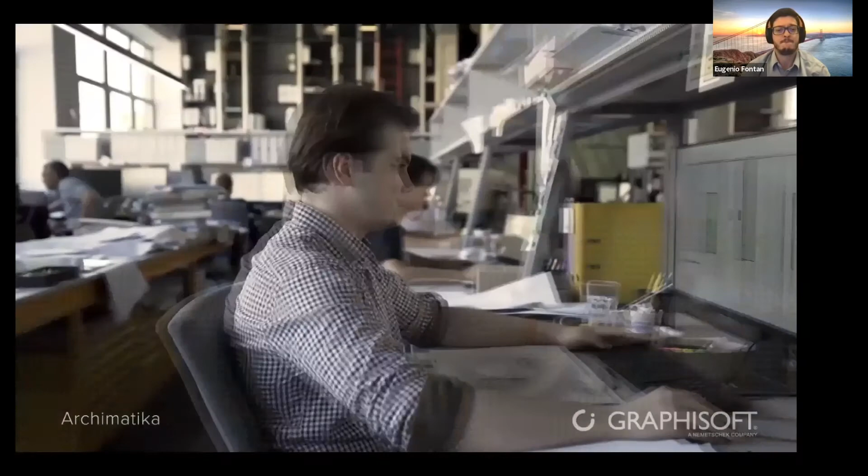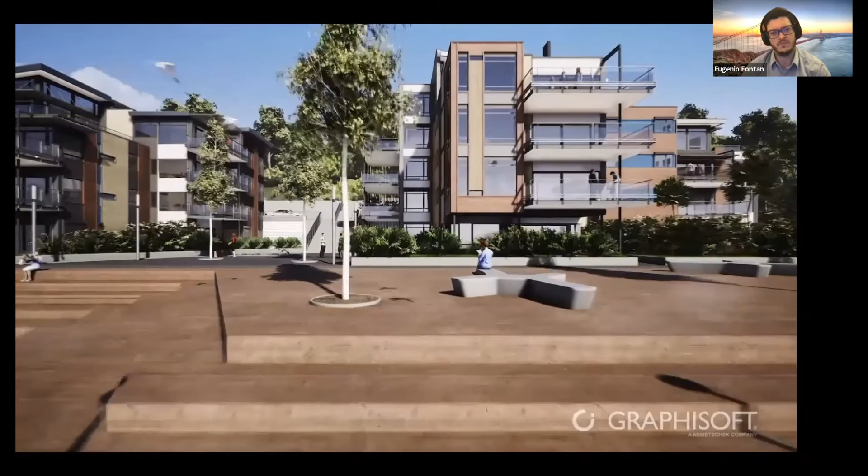First of all, let me introduce briefly my company, Graphisoft. Graphisoft develops three main solutions, which are called Archicad, our collaboration tool which is called BIMcloud, and our application for sharing data, which is called BIMx.

And also working together with the government bodies to try to understand which are the best BIM standards to implement in the region. I think this has shaped the focus of the presentation that I have, which is that there is still a lot of misconceptions, a lot of not best practices in the use of this technology.

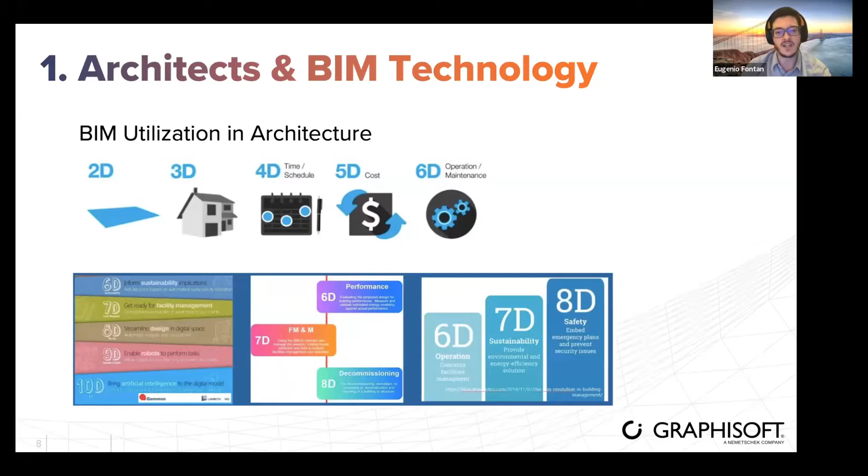I would also like to highlight the BIM benefits, which I think we all have heard of or have used: doing collision detection to understand clashes between disciplines before they happen in construction, extracting accurate quantities for cost estimation, generating accurate documentation, doing energy evaluations, and doing construction performance simulations.

Knowing all these names that we have heard, and in many cases use, the main values would be that BIM is supposed to save errors in the development of our projects, save time, save cost, and help us do a better design and better execution.

And actually, instead of saving time, they are very time consuming. Also the tools themselves, as software, crash or cannot handle large or complex projects as we wish, because they should align with our design intention.

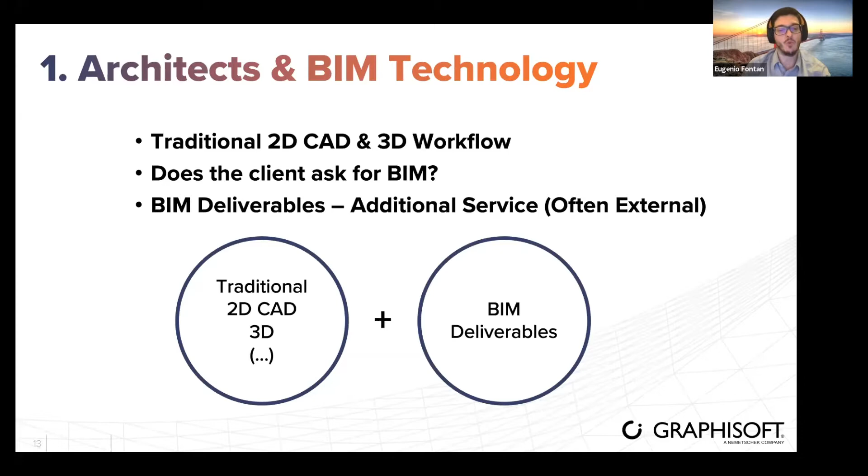And then it often happens that we end up producing double work. We first produce everything as we used to do, and then we produce the BIM deliverables.

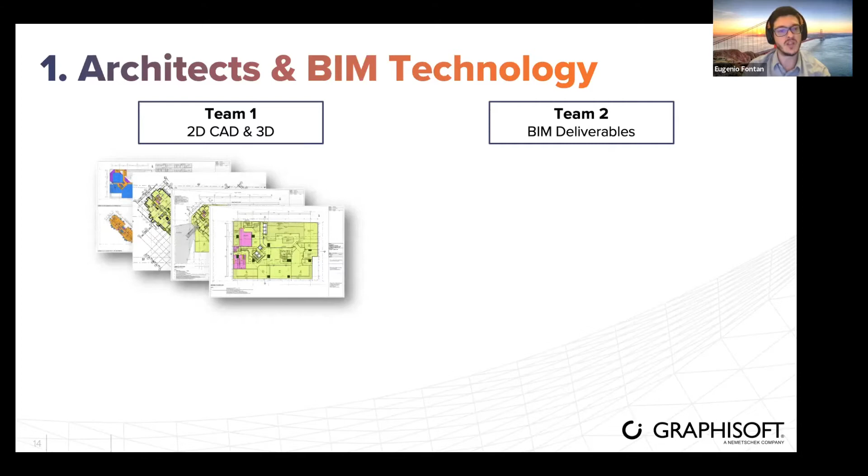So we end up having in companies - and I've seen this also in large organizations - two teams, like two families existing in the same company. One team produces documentation, whether for design or statutory submission, and also 3D models for different studies, renderings, animations. The second team, internal or external, tries to do this BIM workflow in parallel, these BIM models that can produce all the possibilities we were discussing.

So what it means is that we use BIM only when it's required, and the rest of the time we work the way we used to work for the past 30 years. This means we end up having duplicate teams, resources, and coordination, and we duplicate efforts, which means we don't work in an efficient way. For me, it means we're not able to take advantage of technology. We don't leverage BIM to make our life easier, and it ends up being the opposite, right?

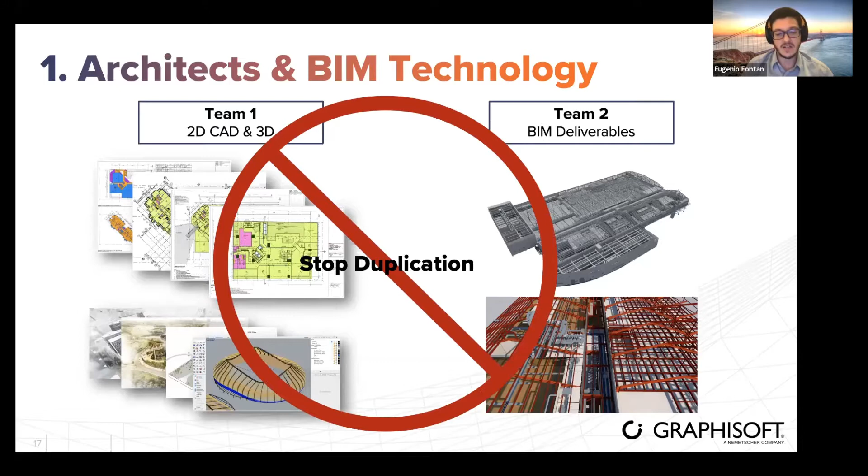So when I see this across different organizations, audiences, or teams we get in touch with, I believe the first thing we discuss is how can we stop this duplication, right? So it's important to understand.

Sometimes I talk about these topics and people say, okay, but what's the point, right? Why don't we work the way we always did? It's fine, we are successful, we have projects. Well, I believe we all have a responsibility to improve.

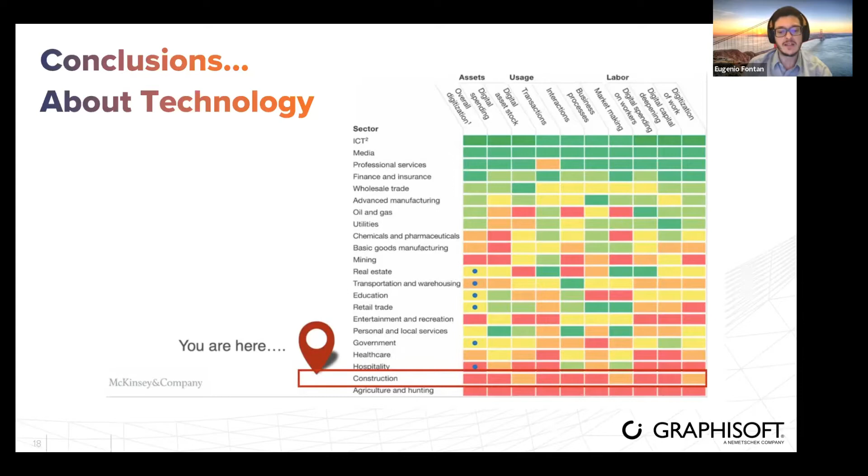We haven't become more efficient in any way, and of course, not more sustainable. I believe that this is something that as architects we have a great responsibility for. So that was the point about what I have observed in different markets about the relationship between architects and BIM technology.

Very often it's not always like that, but it's very common.

What I would like to go to now is the second idea, which is the idea of the intuitive and smart workflow. From my perspective, and I believe also from a lot of the audience's perspective, we should be using an intuitive workflow that automates documentation and data, so we can avoid duplication and truly save time and errors.

We can focus on doing better architecture. We focus on spending our time adding value, and try to automate and use technology to save time on manual labor, so we can do better and more sustainable design and better execution.

So for me, this is the message that I think we need to incorporate and communicate, and we need to try to improve following this idea.

So the idea we propose is that instead of having two workflows, we don't have this idea of working in 2D and 3D separately. We just have BIM as the only workflow in which we automate everything we need to develop our projects.

I know that for some people it sounds like, okay, we already use this, but a lot of peers, a lot of colleagues, they hear this and say, look, how can we do this? How can we really just work in BIM from the beginning?

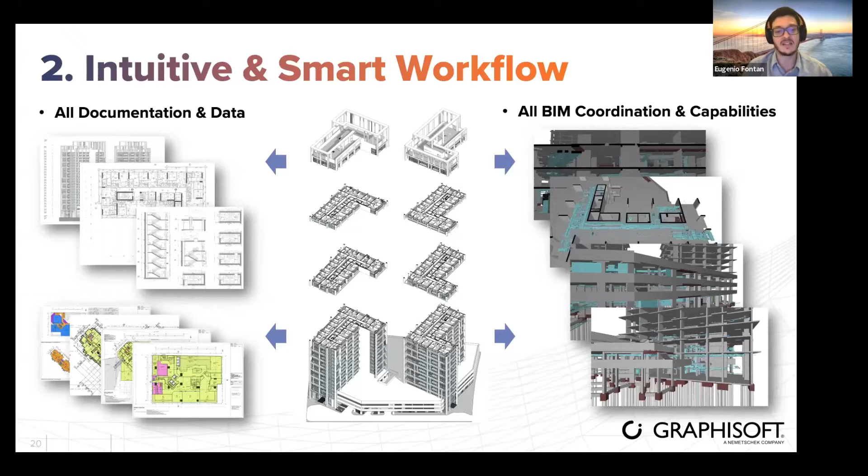Well, I believe that this is the objective, this is the idea I truly believe in. So I'm going to present a few short videos about some topics that I believe can create an intuitive and smart workflow, and how BIM can help us achieve it.

Some of these topics we will discuss later, as Winston was saying. We will develop some hands-on workshops later on throughout the year that will have to do with these topics.

First of all, I believe the smart workflow we propose comes by the hand of Archicad, which is the BIM authoring tool that we develop. The first step, starting from zero, is that if we want a smart workflow, we should start with intuitive design and modeling at the concept stage.

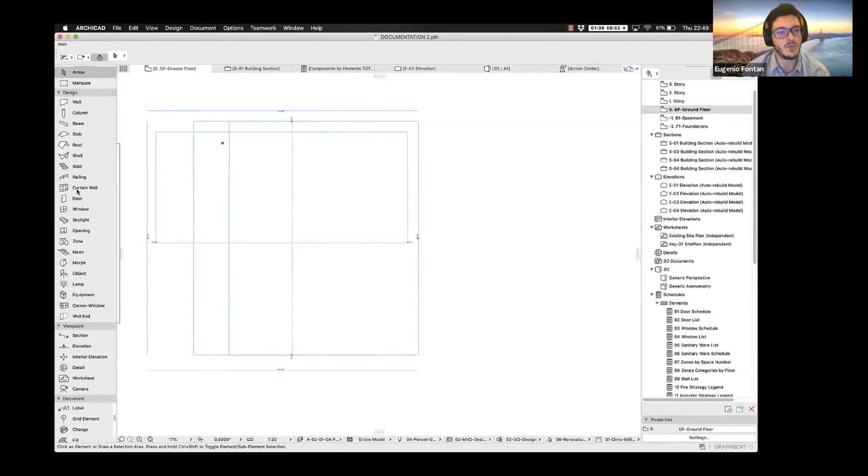In this video, what I'm showing is a very, very tiny, simple model from which we can start from zero. The reason I show this exercise is because, again, most of my colleagues and even friends say, look, there's no such thing as starting from zero working in BIM -- we cannot do that because it's not intuitive and it's not easy.

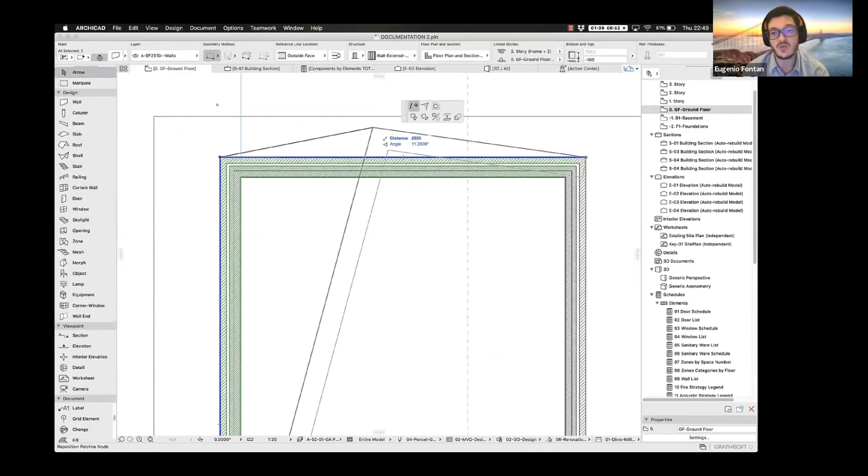Well, I believe that at least the solutions we promote, with a few clicks, let us create a few elements. So we can model as easily and as comfortably as in other 3D tools, with the main advantage that as we model, we also have information, as you can see, as if we're drawing in floor plan. What we start to have is a model that has a lot of information that is going to help us later on develop our project.

So in this case, we're doing some walls. Now we're doing a curtain wall. Instead of having to model all the different parts and pieces, with a few clicks we already have a system in place. And the parts we are modeling already show some of the 2D information that will become the documentation we export later on.

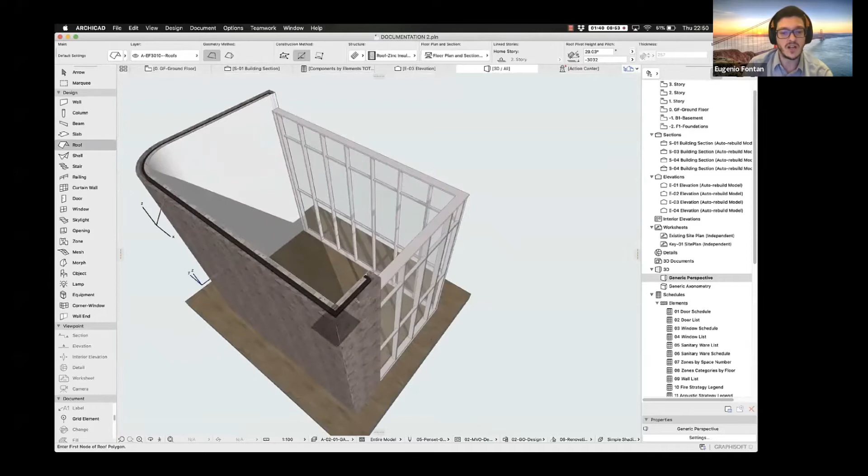So now we go into the 3D window. We can model both in 2D or in 3D when we use Archicad. And we are going to do a couple of operations that will get us the design we desire.

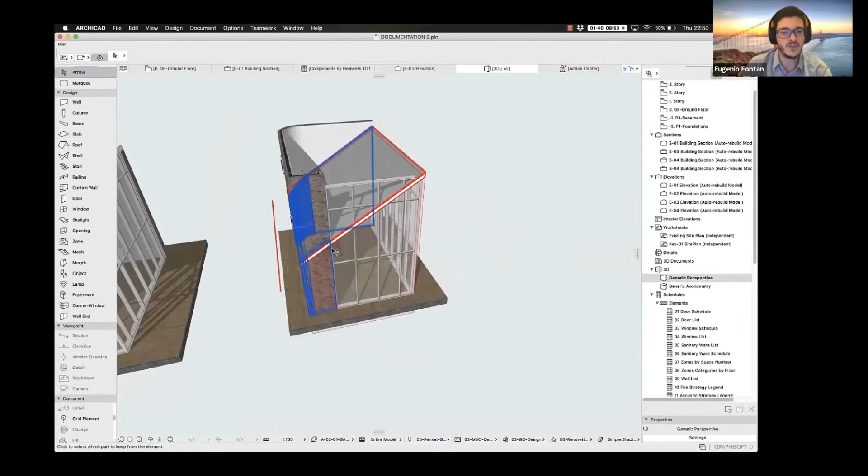Another thing I wanted to highlight is that some of these BIM complaints or BIM problems we were showing at the beginning have to do with how easy this workflow is, but also we've seen how easy it is to create curved geometry, both in walls or in the roof. I believe our BIM solution doesn't have the limitation of geometry.

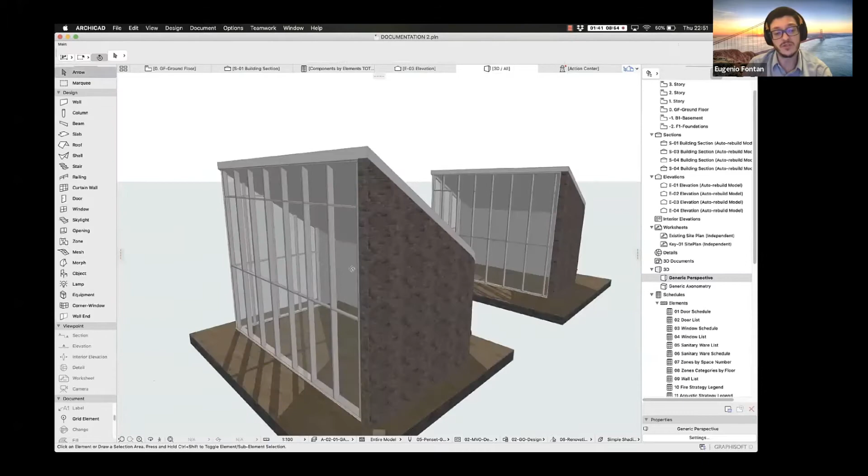We want to provide a robust solution that can very easily create curved windows or curved walls, without the machine we're working on having to suffer or use too many resources. So we can easily adapt the curtain wall scheme to the geometry of the project, and as you can see, in three minutes we already have a small model, and we already have a few documents -- the floor plan, which could even automate the generation of a drawing at 1:50 scale if we want, and we have some sections and elevations.

As you can see, the elements of the model we use already have some intelligent building materials that interact with each other, so they start to automatically create the connections between them.

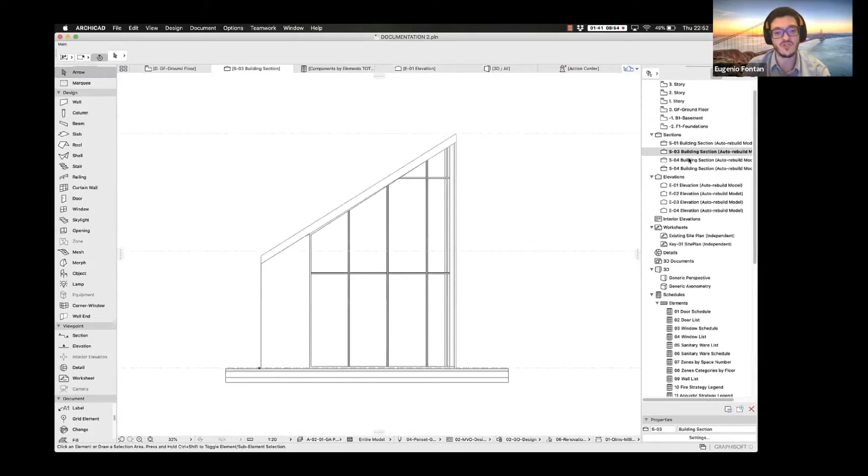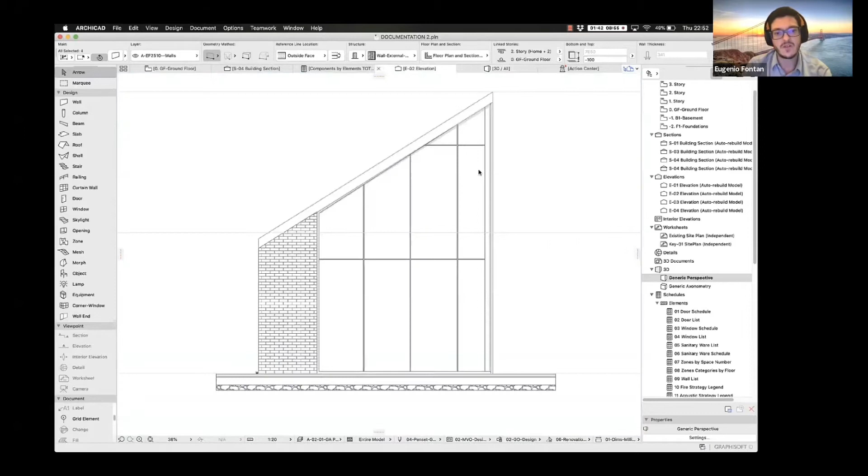Just think about trying to generate an elevation of a brick wall. We could try to do that with 2D tools, but when it comes to the curvature, if we want to do it right, we'd have to work it out manually and it wouldn't be easy or immediate. In this case, we can represent exactly what we have, export this documentation, and we don't have to spend time redrawing.

That would be starting from zero. Now I want to show a video of the combination of Archicad and the possibilities of computational design.

I'm sure most of you are already acquainted with this technology, I mean this tool called Rhinoceros 3D. I believe it's one of the most powerful 3D modeling tools. As you can see, with Grasshopper and visual programming, we can automate a lot of complex geometry.

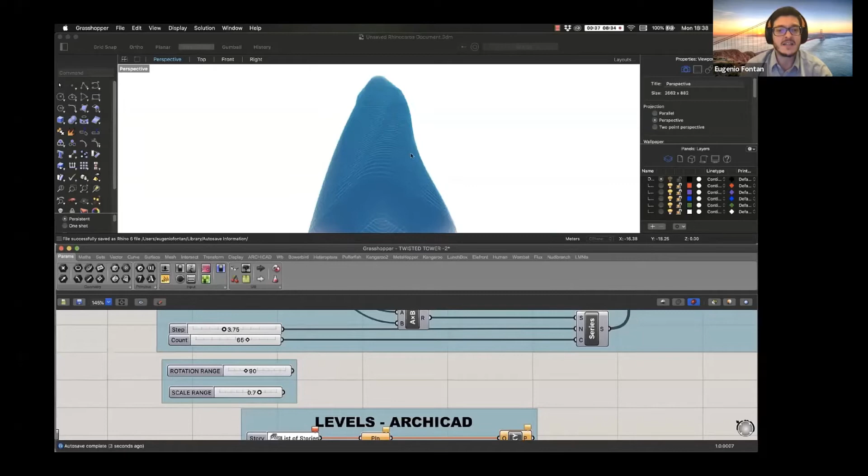We change some sliders and we completely change the geometry of our design. I think this is really where I'd consider automation. And how do we link this with our BIM platform? Well, in the case of Archicad, we have a connection.

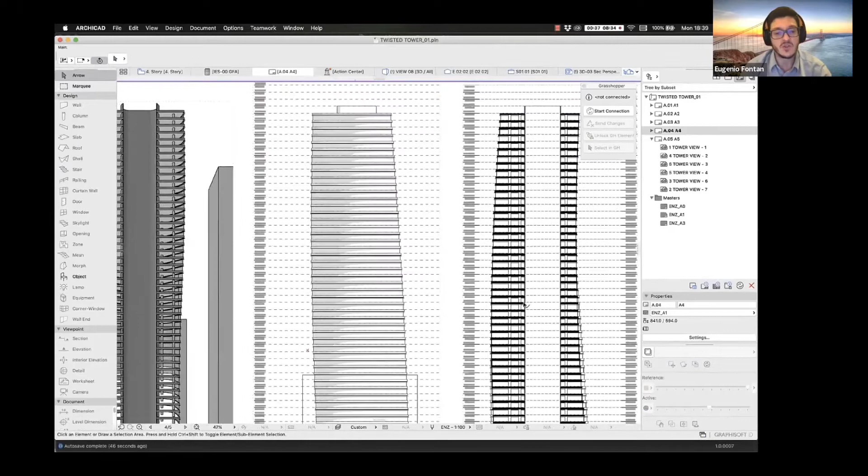What we're seeing here is a first option of a design of a tower that is twisted, very curvy, with some kind of challenging geometry. As you can see, we have the documentation of that tower that usually, if we're not working with BIM, we'd have to export as DWGs and 2D lines, then rework it manually and spend hours producing it. So what we do is delete the first option we have and click on the connection button.

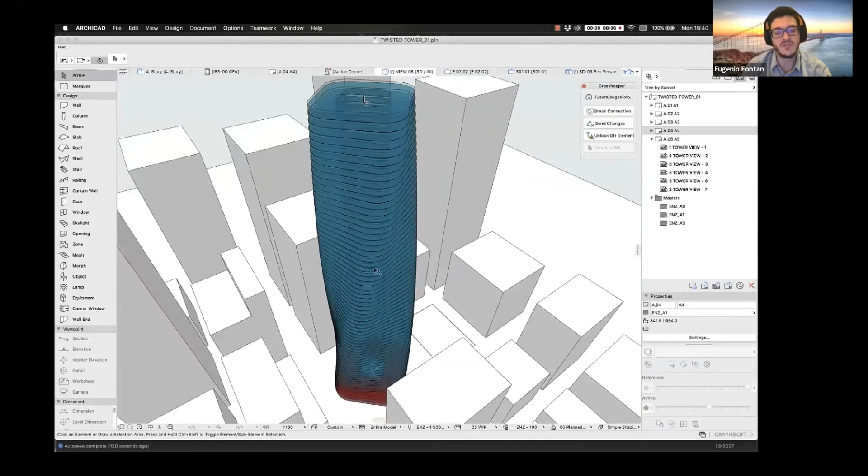In Archicad, now there is established what is called the connection. All these nodes we can see have a little toggle that says true or false. When we turn them true, they start sending elements to Archicad. So the curves and polylines we have in Rhino, as you can see, become part of our model. In this case, we have the walls of the facade and the spaces.

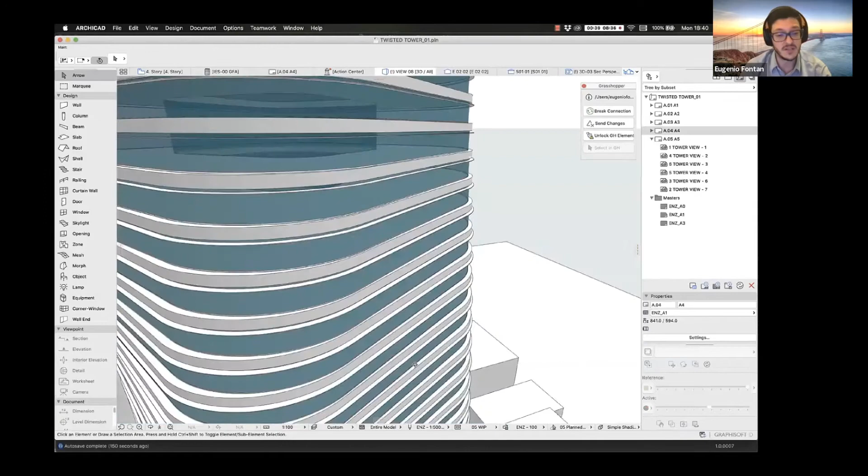These elements are called zones, the spaces of the project. Now we're going to pass from Rhino to Archicad the slabs and the shading. So anything we have in the model in Rhino becomes part of the model in Archicad. And this means this model is the one that's going to generate the documentation and information for ourselves.

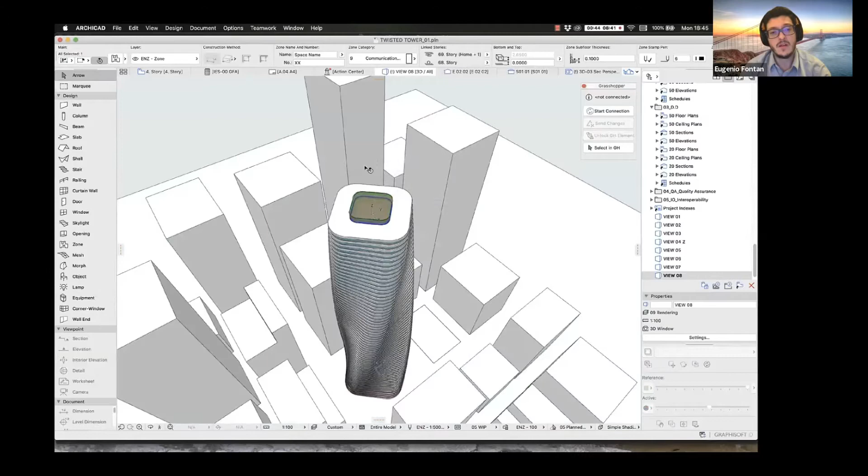Now we're going to pass, for example, the parts, the core walls of the core structure of the project, also the spaces, the zones. And now in the last step, we're going to pass the structure, the columns.

Those turn red when the connection is not running. When it's running, it turns gray. We can click true to synchronize, and in a few seconds the column will arrive. Of course, if the geometry is very challenging, this connection can take a bit more time.

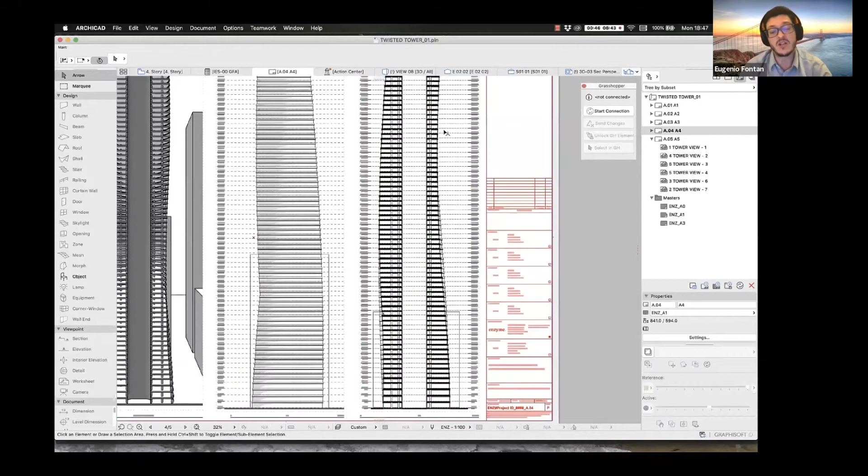This video is, I think, less than 4 minutes, and I just accelerated it, so it goes twice as fast as real speed. The funny thing is that means in 8 minutes we have someone who has done a project in Rhino and Grasshopper—and we probably all have friends or colleagues who are very good at it, because I think it's really a great tool—in a matter of minutes, we can have that model in Archicad, and we can have this documentation automated.

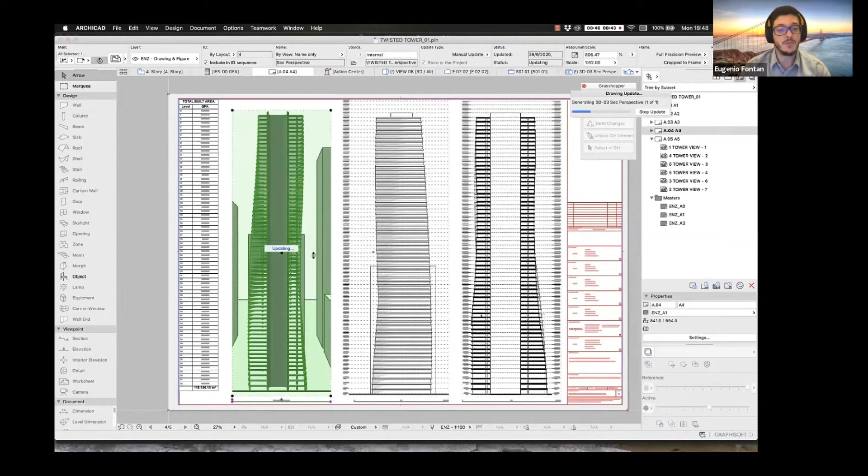Also, something I want to highlight is that we've all heard that some BIM platforms and tools are not robust enough to store large or complex models. So what we want to promote among architects is that our solutions are robust enough to hold these large models. That's where we think this makes the life of an architect easier—we don't need to split the model into many pieces, and we don't need to wait long hours for the geometry to display.

We can really store large models, and we don't have to deal with the heavy limitation of needing to buy a new machine every time.

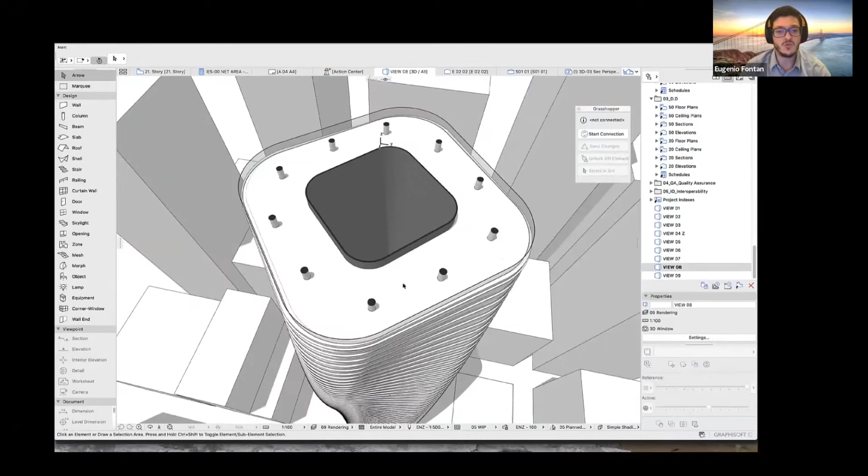We keep automating the drawings from the models. You can see that the plan has changed following the new design, and of course we can take views and explore the 3D without having problems.

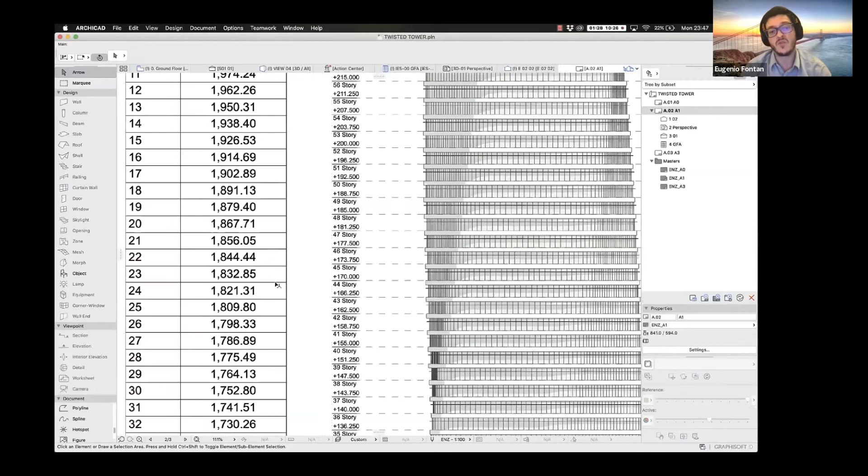When we develop our design a bit further, we can have the curtain wall and more detailed documentation that, once it's in Archicad, we can keep developing using the Archicad tools. Once we have this, it's enough to have one click, and we export all these PDFs in DWG format or whatever is needed for the development of the project.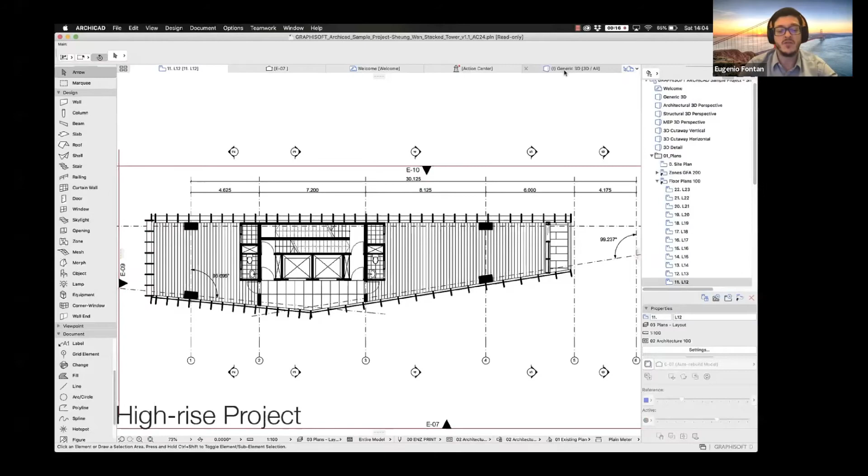Once we start the design, we continue with the documentation. In a more advanced stage of the project, we want to extract this documentation saving as much time as possible. In this example, we're showing a tower with curtain walls and a lot of geometry, and we still can move around without any problem.

We can also work in perspective, which I believe is quite important, because I really like to export axonometric documents, but I need to design in perspective. For me it's quite important. In this case, we're going to use one tool called trace and reference.

This means that whatever view we have in 2D, we can overlay another view in 2D - in this case, for example, the elevation. With this menu of trace and reference, we can see more or less the trace.

We can even hide the active view, which is the floor plan. This allows us, as we work in the floor plan, to see what happens in the elevation, in the section, or another floor plan at the same time.

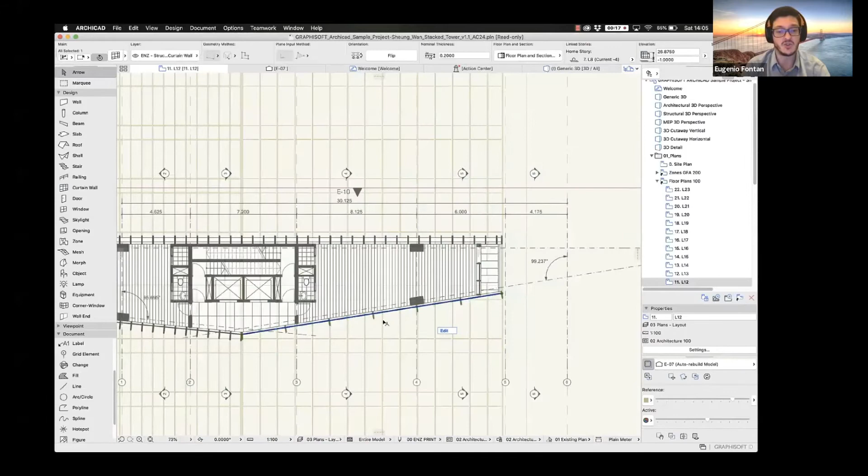In this case, we're changing the dimensions of the curtain wall. You can see how it changes in plan, and now, in a few seconds, it updates the elevation, and we can see how the elevation has changed as well. We can switch between views.

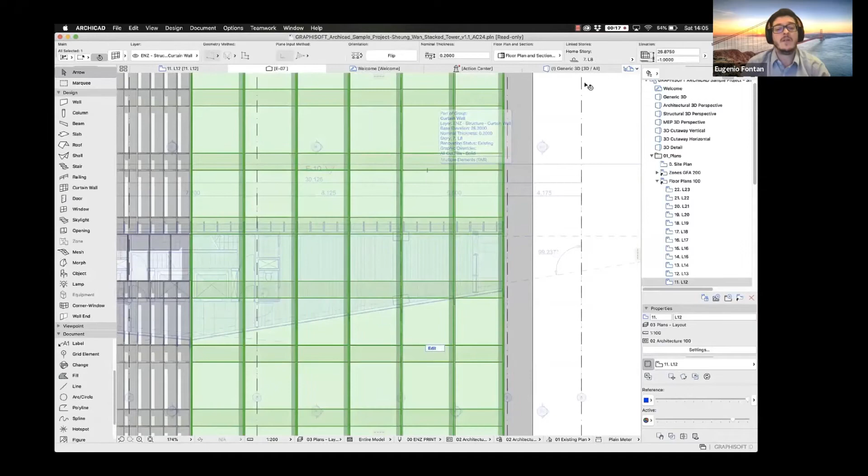We can now go into the elevation and have the floor plan as a trace reference, so we can constantly have feedback of how our design changed when we change different parts of it. I think this helps a lot in the design process and saves time in documentation production. And in the 3D, we can have a look.

If we're not convinced, we just go back and put the same dimensions we had before, or we can keep modifying further, and of course floor plan and elevation will update.

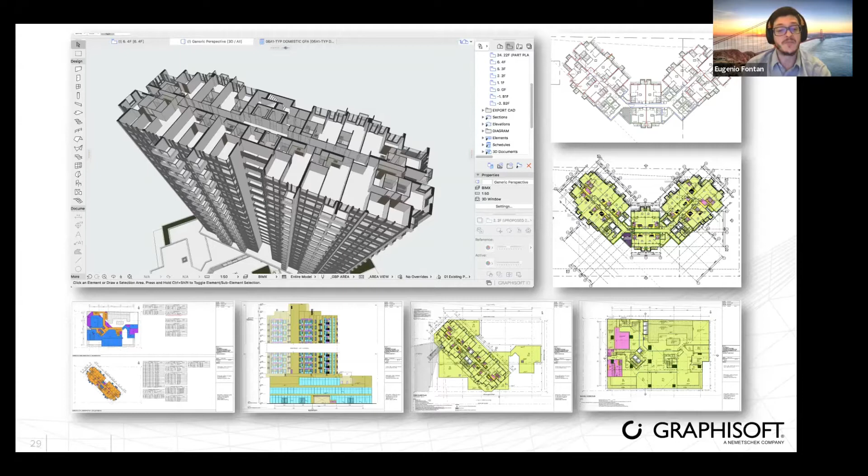In another further workshop, there is also this template that we developed together with some of our customers for the Hong Kong market, which is to automate the submission of the GBP for the buildings department. I think this is also an advantage to be able to save time at this stage.

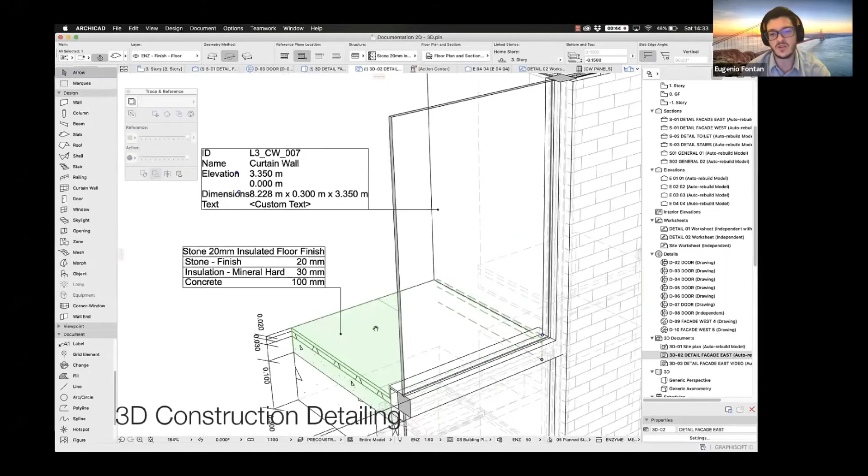In this short video, I'm going to show how we go deeper onto the scale of construction documentation. Doing construction details in 2D is something that is necessary, but sometimes we want to explain things with axonometric or 3D views because it also explains very well.

As you can see here, we have the different parts of our model that we are selecting that are producing the documentation. If I change the type of wall, you can see that the labels are smart - if I change one part of the model, all the labels in all documents will be updated. In this case, I change the material of the slab, of the finished floor, and the description will be updated as well.

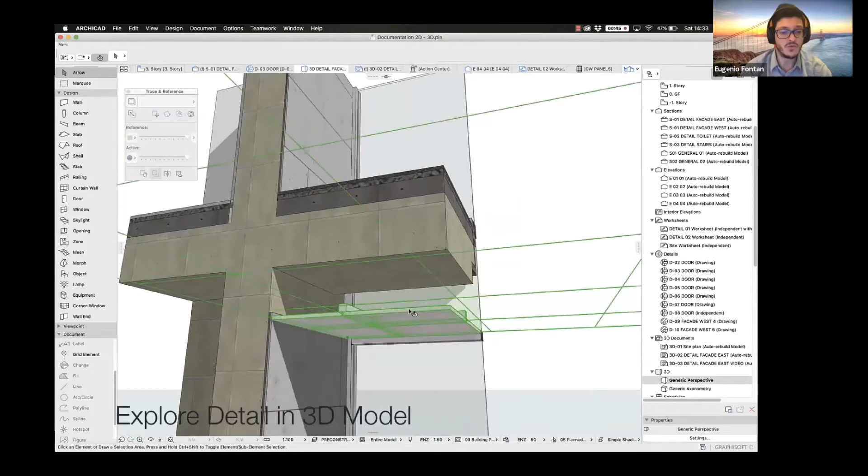Another interesting thing is to be able to go back to the 3D view that generated this 3D document, so we can move around and study the detail more closely without having to create additional cameras or views. We can re-navigate in a natural, easy way, so we can make sure the design keeps looking as we want it.

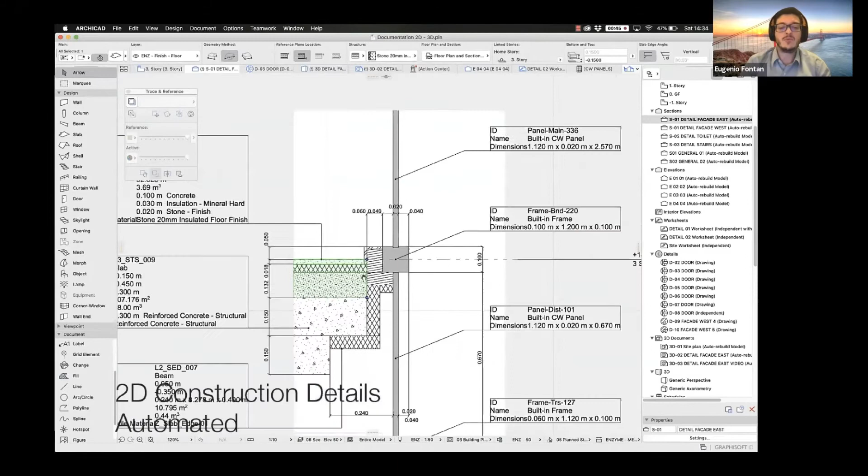From that same model, those elements generate the details. I believe that up to scale 1 to 50 or 1 to 20, it's easy to have all the documentation automated from the model.

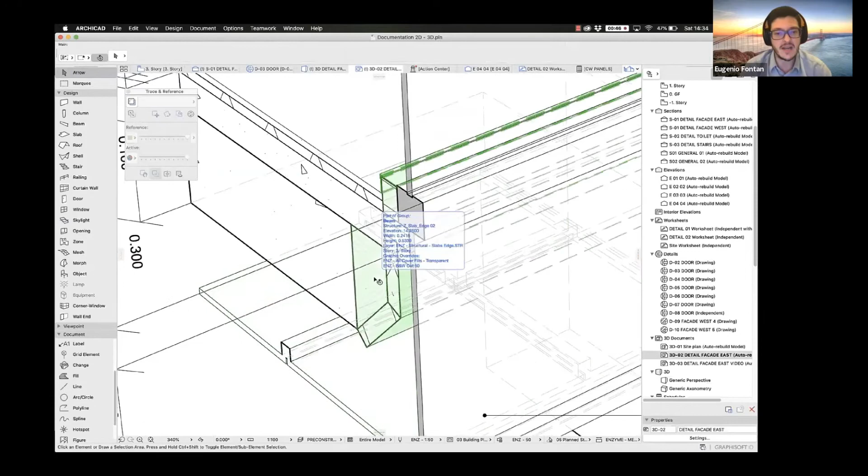When we want to add more detail, to get to details at 1 to 10 or 1 to 5, we can draft on top of the details, but we always do it on top of a detail that comes from the 3D model and is coordinated. As you can see, we change one type of profile and it updates in all the different parts of the document.

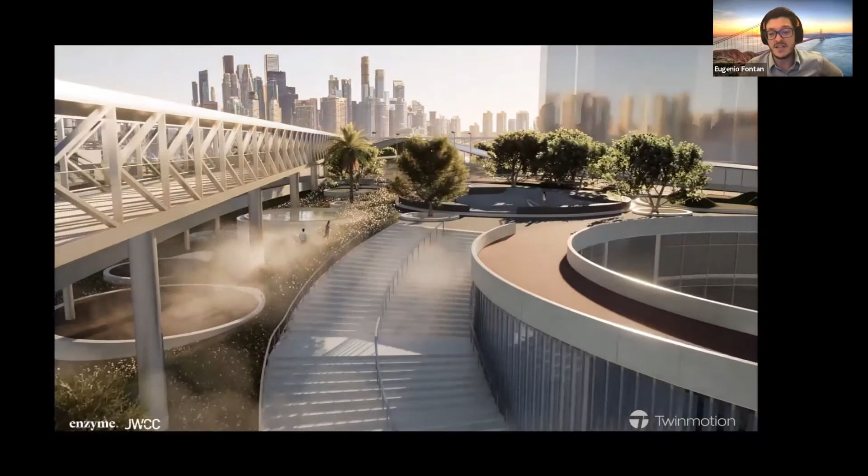Another aspect that an intuitive workflow should allow us is related to visualization possibilities. Sometimes to explain and communicate our projects, it's quite important to have really impressive animations. It's very common that we need to pay expensive teams to do this animation outsourced, but this platform, called Twinmotion, is really easy to use, and we can create these animations in-house.

I have a brief example that I opened in YouTube because I wanted to show one of my projects, but for some reason the link is not working. I'll have to show you this next time. I wanted to show that this animation is not something we need to outsource. It's very easy to navigate, very easy to create ourselves, and it gives us the chance to produce this type of material without having to go after additional external consultants.

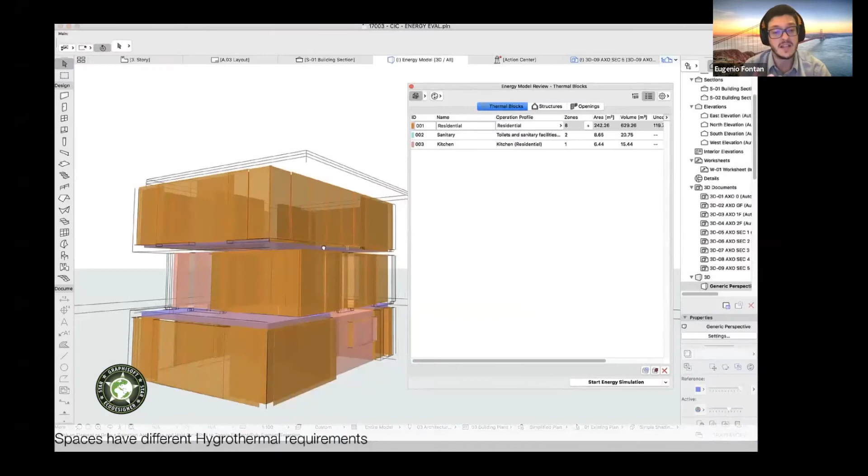Another aspect of the workflow we promote is about energy evaluation for sustainable design. In Archicad, the spaces, called zones, have information about the temperature and the different comfort requirements they have. These spaces also understand the different construction around them to get that hygrothermal comfort. So if we change the construction of the project, these spaces will understand that change, and the energy requirements needed to reach that comfort zone will change.

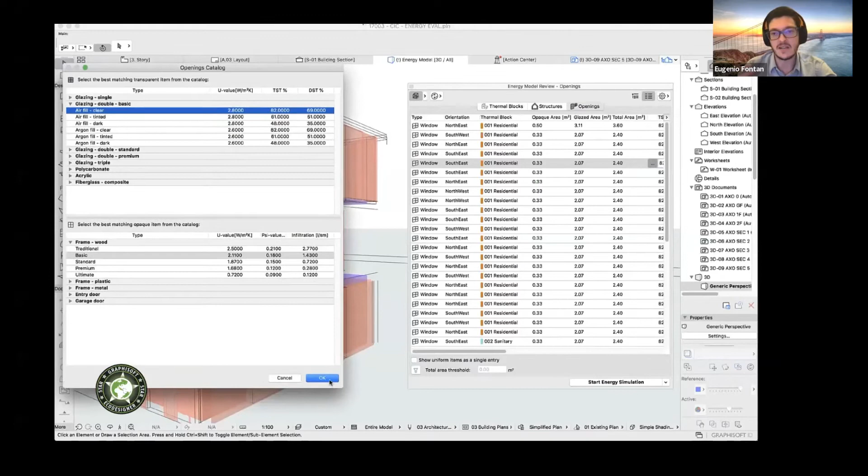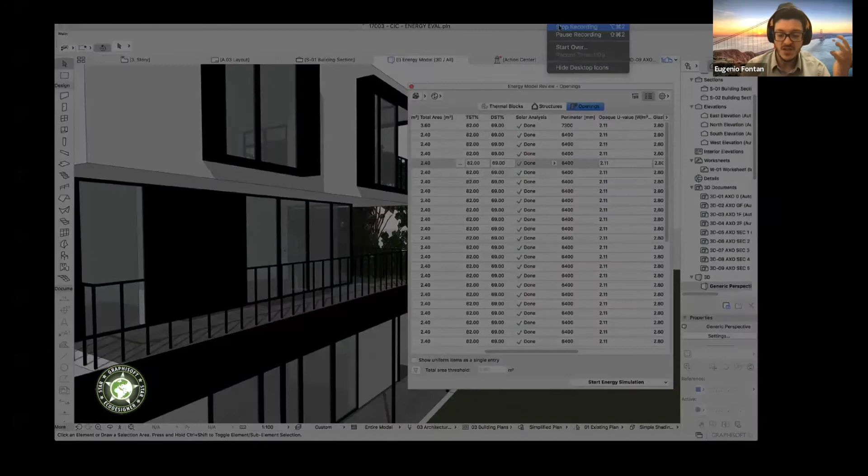We can evaluate, depending on our design decisions, the energy requirements of our project. We can even select, as you can see on screen, the different glazing systems, windows or doors, and analyze all the physical characteristics, even seeing how the sun impacts that glazing surface. This is important because it generates the greenhouse effect. If we change the location, orientation, or shading of that element, this data will be updated. We can use the model again to do this analysis, because it already has all the physical characteristics of the real construction.

Regarding compatibility, Archicad is quite compatible with many different platforms. I tried to put here all the options I know are available. Archicad can very easily exchange data with this group of tools, exporting and importing CAD files, Rhino files, SketchUp, connecting with Twinmotion, Enscape, Cinema 4D, and of course all sorts of PDF documentation and DWG. We can extract hundreds of packages of drawings with one click in these formats.

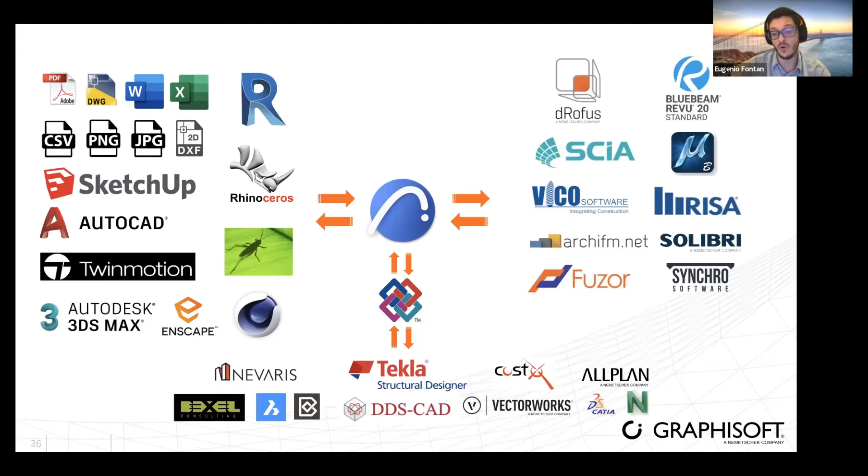We also have direct connection with many BIM solutions, shown on the right side, like dRofus, SCIA, and others. Using the Open BIM approach with IFC, we can collaborate with all the other BIM solutions in the market. This means Archicad allows great compatibility with other tools and other teams. This is a diagram from one of our clients in Japan, Nikken Sekkei, who have been using it for many years - you can see the logos are totally outdated. They've been using Archicad as the backbone combining the different operations of the project and the different performance of the various tools.

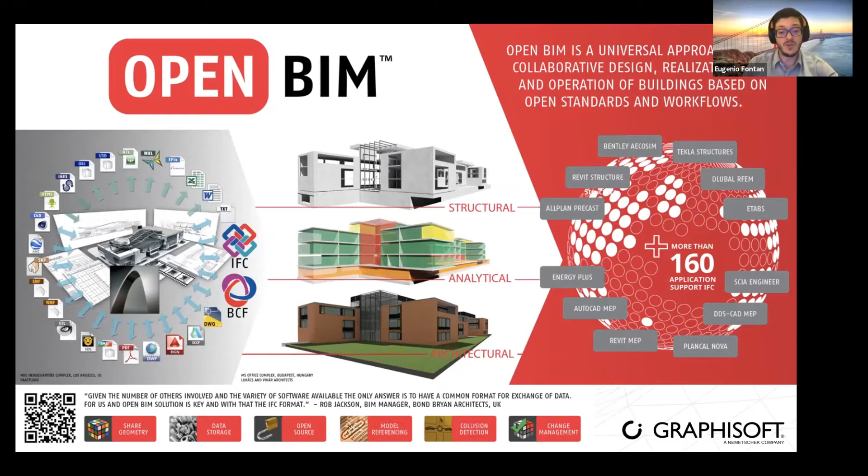Some of you will be familiar with the concept of Open BIM, which means exporting BIM in open format. Our solution is really compatible with all the Open BIM standards. Working with the construction industry and Hong Kong BIM, I've personally conducted workshops explaining best practices to avoid data loss between platforms, in this case Archicad and Revit. These workflows can be learned, they're easy to implement, and we really enjoy working with our customers to make this easier for them.

So in this short video, I'm going to show some of the easy compatibilities, or interoperability, that Archicad has with other platforms. On a website like BIM Object, we can download objects in different formats. In this case, we're using SketchUp, IFC, and Revit.

This means we have access to hundreds or thousands of online libraries we can use. Again, it depends on how the object has been done, we have more or less level of detail. Of course, later we can add as much data as we need.

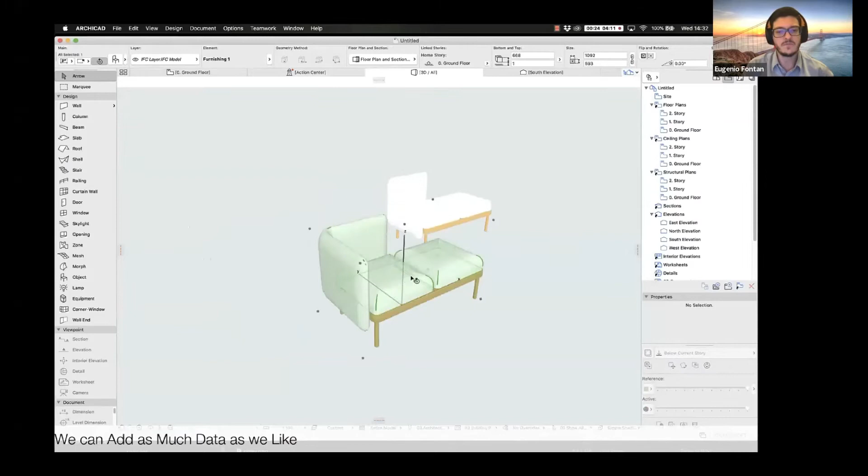Now we're going to add the Revit family. There's this menu, Import Revit Families, and it will be translated as a native library of Archicad. We can choose the different level of polygons, and once it's in, we can go to the object tool and place the new Revit family.

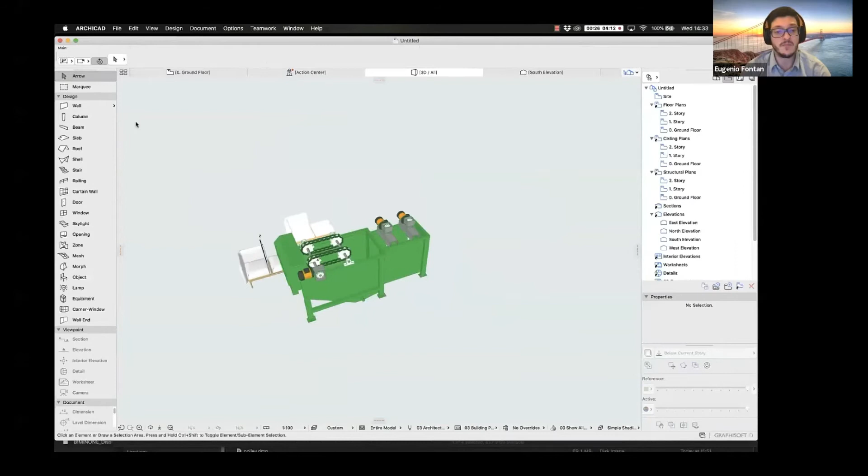These elements can be edited further later on to be smarter or have more possibilities. When we just drag and drop, maybe some of the native possibilities of the object aren't there, but very often there are a lot of them. For me, I think the relevant point at this step of the process is that we can change the data inside the object.

Here you see, when we do Save As from the 3D window, you can see all the different format files: Collada, Rhino, Google Earth, SketchUp, and the same from the program. We can just directly save as in almost any format needed for our architectural work.

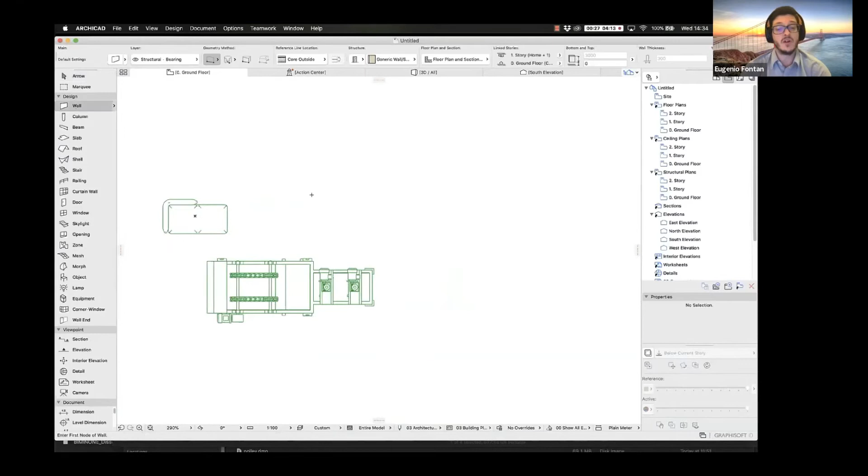Apart from this, Archicad comes with thousands of predefined smart objects that are highly customizable. In this case, you can see the possibilities of having different types of doors, and all these objects are here out of the box already when you use Archicad.

Apart from the possibilities of doing our work, I think that even nowadays, more than any time, we need to be able to work from anywhere, work from home or remotely. That's why we have this BIMcloud solution, which allows a team to work within the same local environment, different people in the same project, but we can also connect remote offices very easily, collaborating from different countries in the same models.

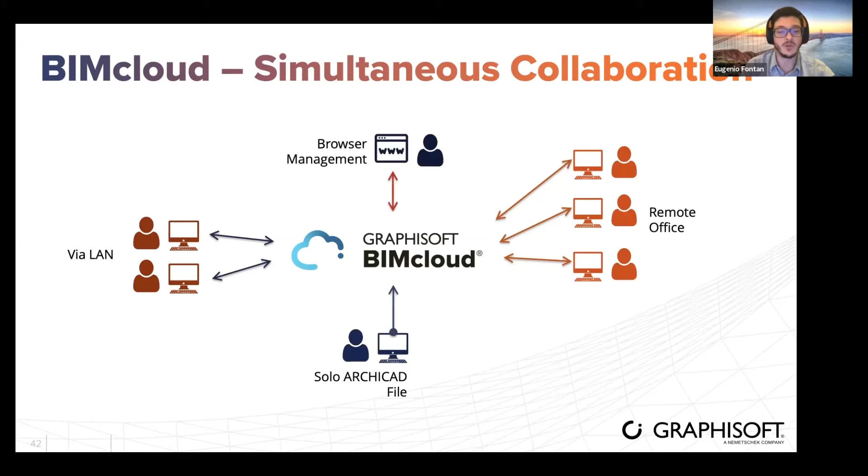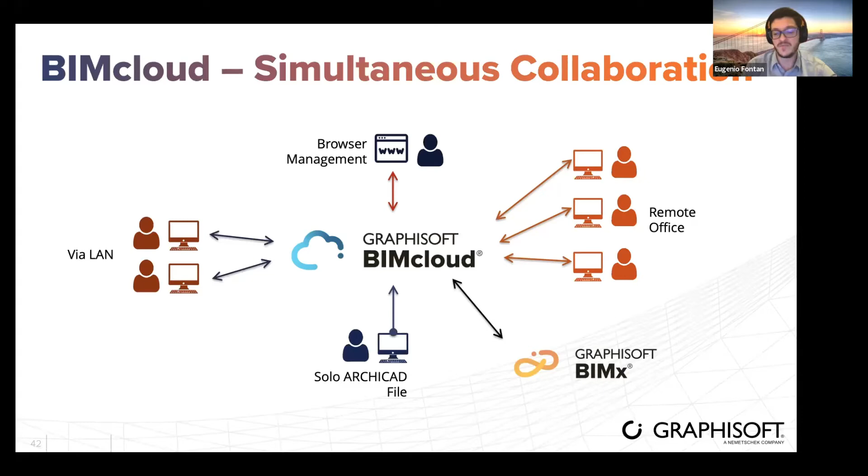We can also access this data and these projects through a web browser. And then the connection with our other solution, BIMx, will let us see the project at any time during its development.

In this video, I want to show briefly this collaboration workflow. You can see here on this palette, the one that says Teamwork, it says Andrew. So this person, Andrew, is working here, and there are two people connected to the project: Andrew and Marty.

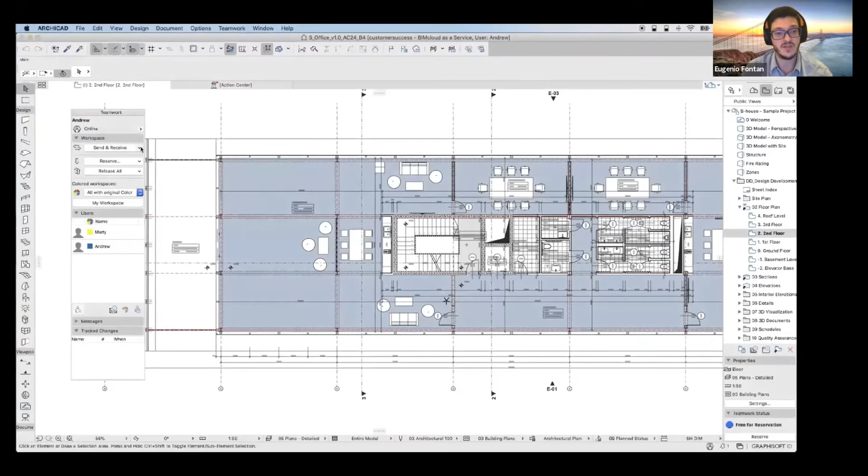What's going to happen is Andrew will send and receive, and he'll receive the changes from Marty and compare them. So let's have a look, we go Send and Receive, and Andrew receives the changes. What do we see? In blue color, we see the new layout, and in red color, we see the previous layout.

This can apply to every part of the project, meaning the project leader can check all types of data and all changes that have happened to any element, and can evaluate, accept, or reject them. Or even, out of the blue, we can open our model after a meeting with our clients and select any element to add what is called, in this case, issues.

You can allocate issues and tasks to different parts of the team, so you can even prepare all the tasks the team has to work on. So everyone knows what they have to do, and everyone works together in the same model in a flexible and intuitive way.

And then the last step is about sharing our design with everyone. So in this case, we have BIMx, which is the application for smartphones and tablets that will allow us to access everything that we generate from a BIM platform, from Archicad, in a very easy way.

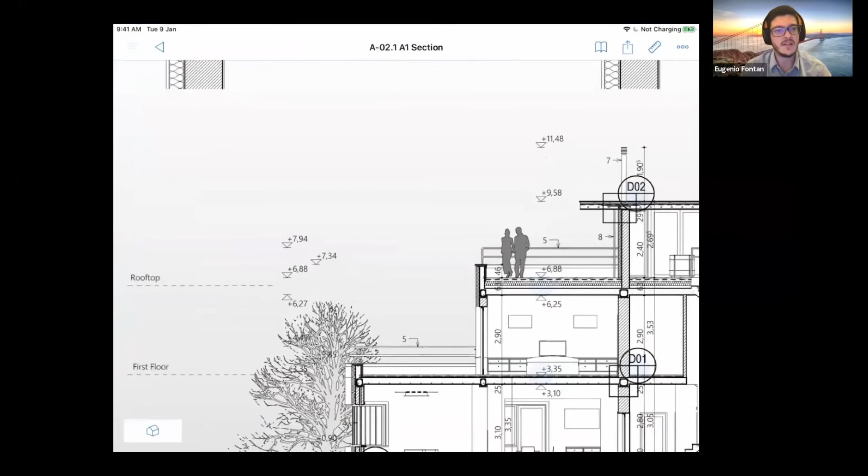So this is a recording from my iPad. We open BIMx, and what we have here are different projects. These projects are called hypermodels that we export from our Archicad file. And this one, for example, is the house we were seeing before.

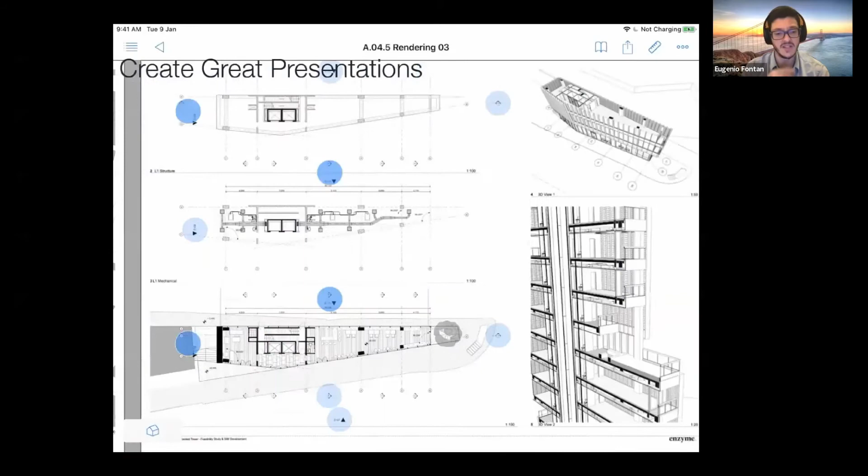First of all, we can use BIMx as a way to generate impressive presentations. We have all the documentation that we have, renders, images, in this BIMx file. The first different thing you can see is we have these blue color symbols floating on the diagrams, but we're going to explain that now.

What we can do is open any document generated from the project that will be linked to the 3D model. So we're not only looking at drawings or a representation, and this is really fantastic when we collaborate with clients. Everyone can have a look at the project from 2D and 3D view, and they can navigate and really have a proper overview of what is happening.

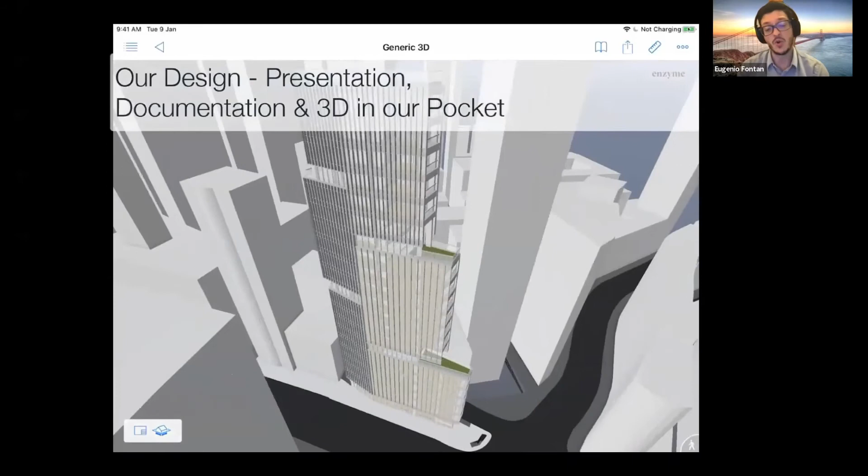This is also very useful when it comes to taking decisions in meetings or even on the construction site. We can really check what is happening and we can check it against reality.

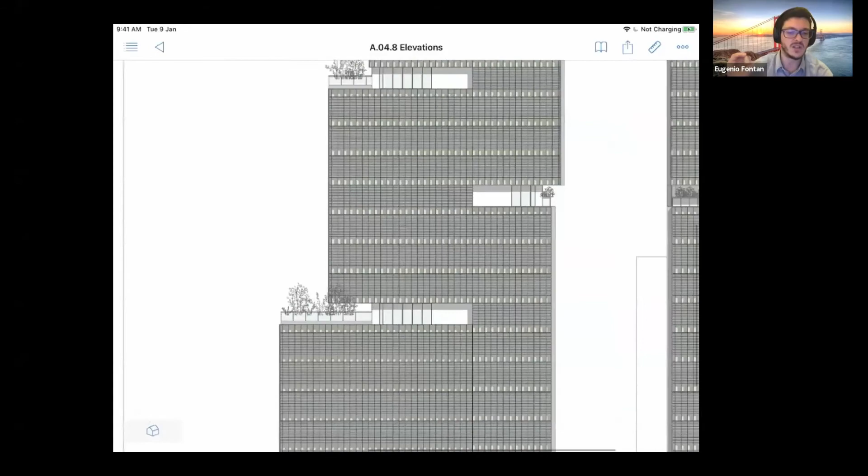When we open this documentation, these little blue spots open the documentation that is there, because documentation is interlinked. So if we click on an elevation from a plan, it will go directly to the elevation. If we click on one detail, it will take us to that detail or to the next plan or whatever. So we can navigate intuitively between documentation.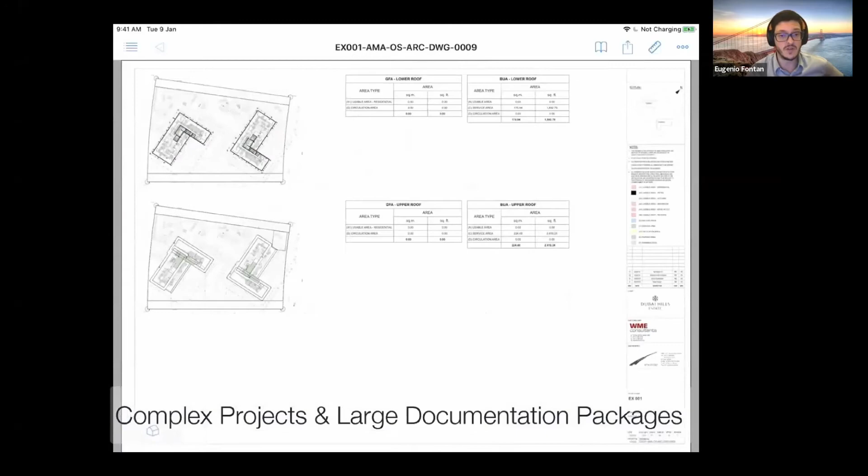The next example is a project that is at the tender stage. This project has hundreds of drawings, from the local submission to the different 1:250 drawings, which are the overall layouts, 1:100. We have details, and all that data is there. We don't even need to print.

Of course, we're looking at the drawing with the same quality as looking at a PDF. Again, with the only difference that when we open our drawings, we're opening our virtual model, and we can always access the 3D space, the 3D area from which this documentation was taken.

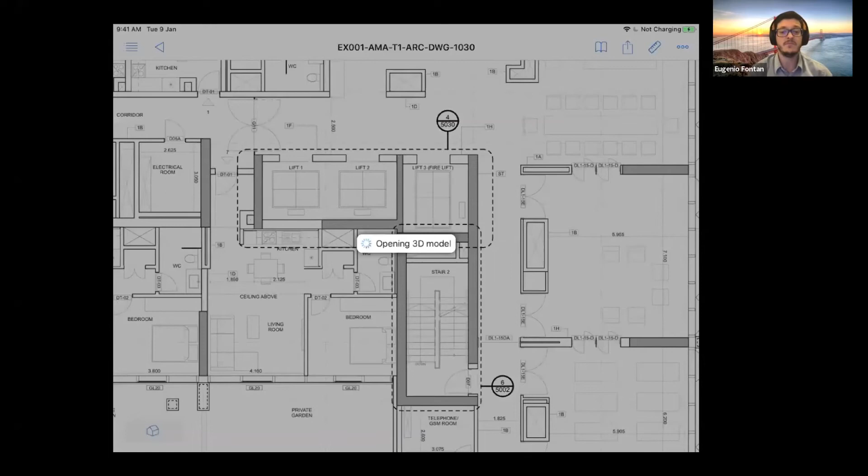Again, this is recorded in real time. There is basically no limitation on the amount of drawings or the size of the project. This case, for example, is a residential project of 40,000 square meters with a podium and 2 towers.

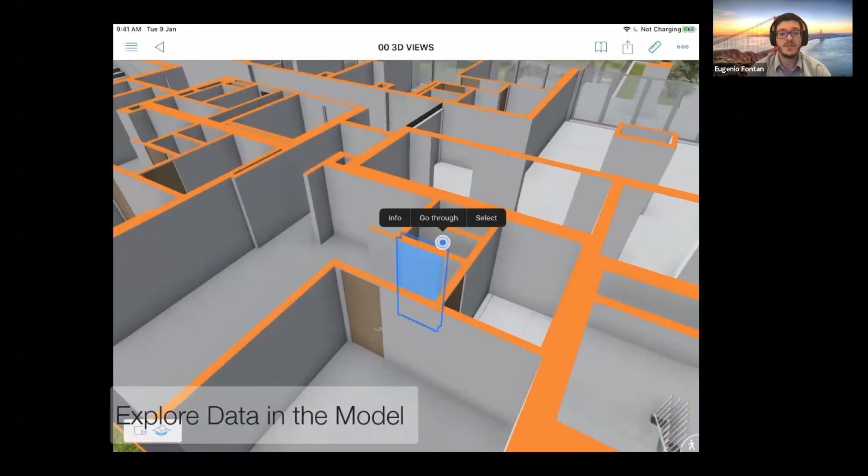And here we can navigate through the different units. And of course, we can select different elements. In this case, we just select with our fingertip, and we will see all the information that we want to put inside that element. Everyone can check it.

And not only dimensions, but also fire resistant values, standards that need to comply with, material, the manufacturer. We can add all the specs that we need here. In this case we don't have much because it's a tender stage, so we removed a lot of the data, but all the specs we need can be added in BIMX. So BIMX allows us to have the full package and all the information needed.

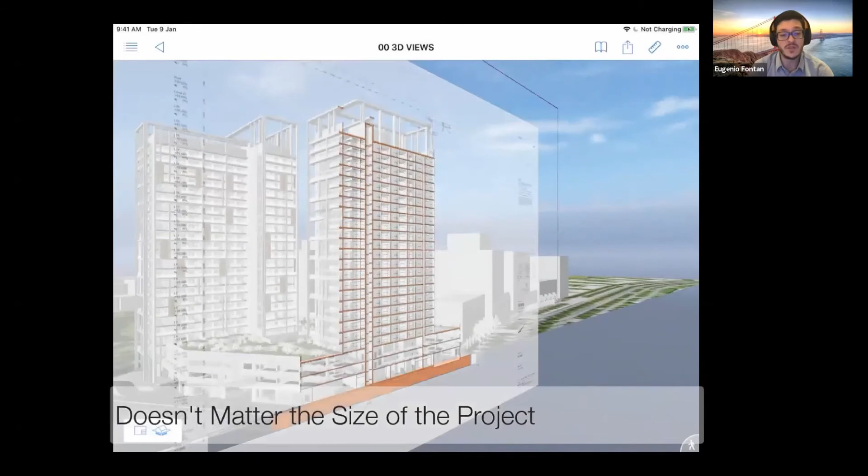And of course, generating elevations, if we have to do this manually using 2D, or we struggle because the BIM platform we use struggles to produce large amounts of documentation from large models, I think that's a problem we should overcome. We should be able to allow the machine to do this job for us.

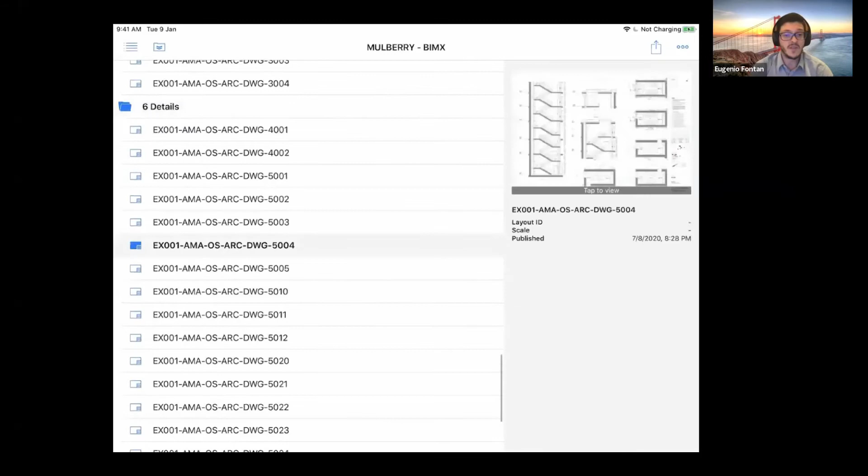Now when we go, for example, to the details, in this case the details of the fire escape, we can also check that most of it has just some labels, some dimensions, but all is drawn automatically from the 3D parts of the project. So again, it's not really hard, it's not really complicated, and it really makes our life easier for us and for all the stakeholders involved in the project.

We can also take dimensions, measure areas, so we can check things against reality when we're on the construction site. And that makes the whole process even easier.

Now I'm just going to show, apart from the capabilities, a couple of case studies very quickly.

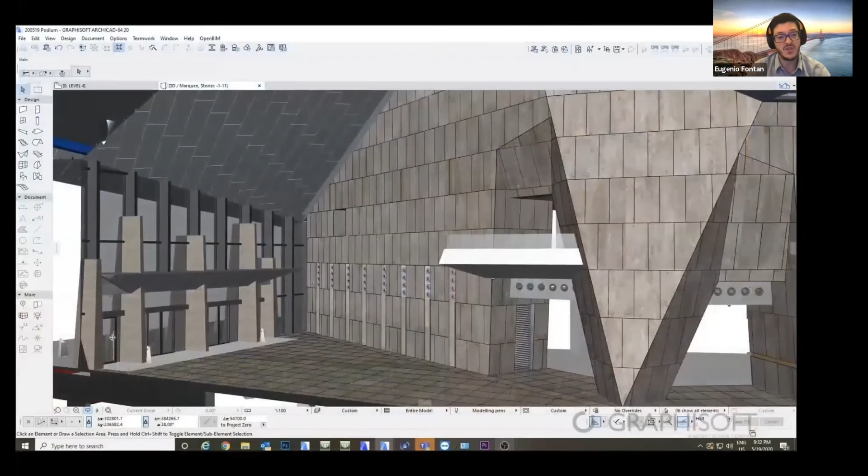This one is from Fender Katsalidis, the second tallest building worldwide currently under construction, which is the Merdeka Tower in Kuala Lumpur, Malaysia. For this mega project, the architects explain how using Archicad allowed them to work more smoothly, because the possibility of handling these gigantic proportions and generating documentation gave them a great advantage during development. It's not about hiring hundreds of consultants to do BIM modeling for you just because it's a landmark mega project. Architects should be in control of this, and our BIM tool should be able to allow us to handle these large projects.

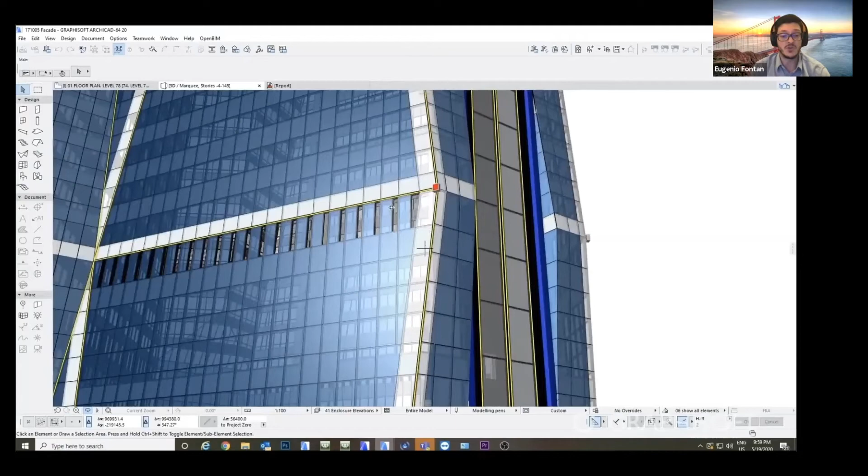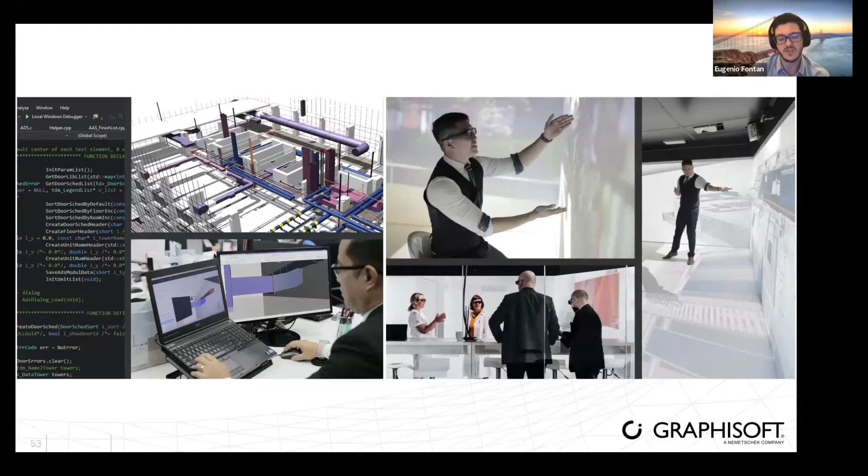The second example comes from the Philippines. I don't know if some of you know these guys, but IDEA is one of the best 100 architecture firms in the world. The reason I admire them is because in 2005, the team leader, Giorgio Tolentino, decided that everyone would drop the CAD tools. That was already more than 15 years ago, and they would only work with virtual project tools, which is what we call BIM. The team at IDEA develops all sorts of large-scale projects, but they also evolved into creating their own tools and programming their own solutions to become even more efficient and to do consulting for other firms. I'm going to show one video of this journey that IDEA was taking on.

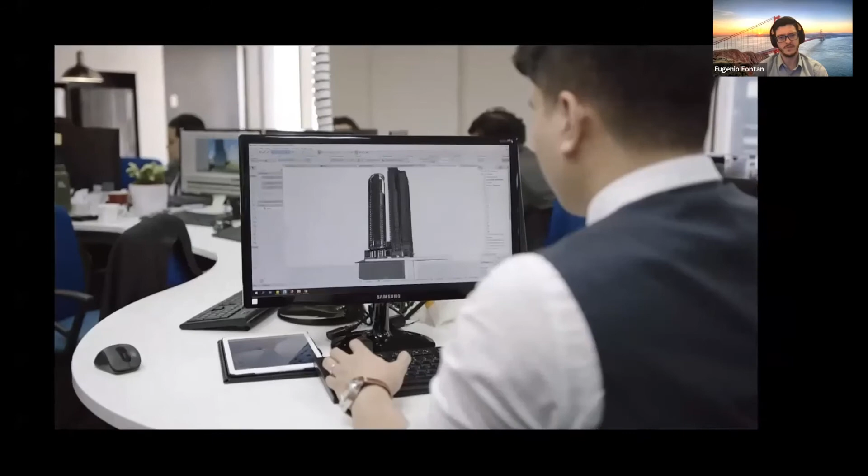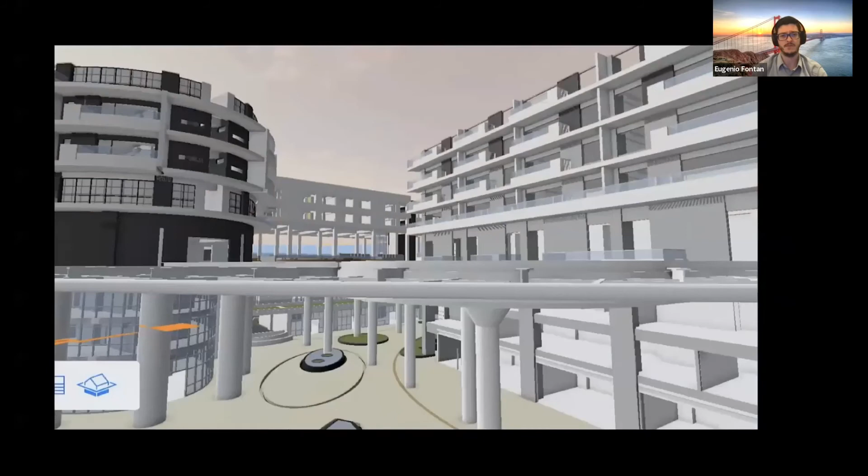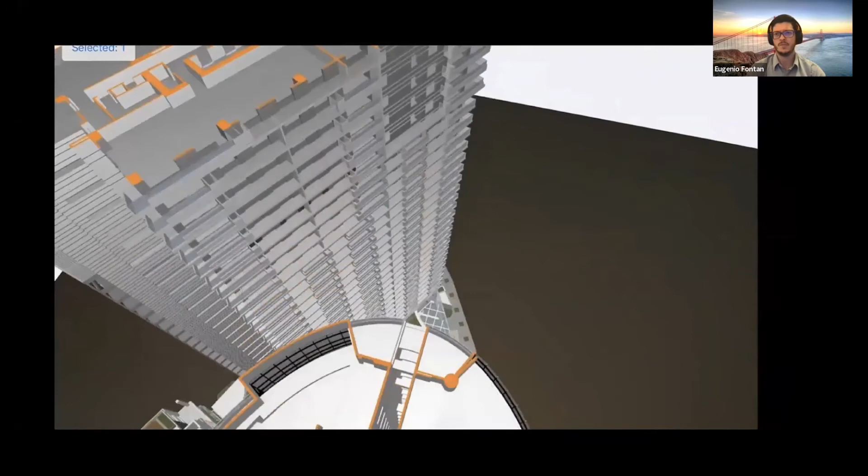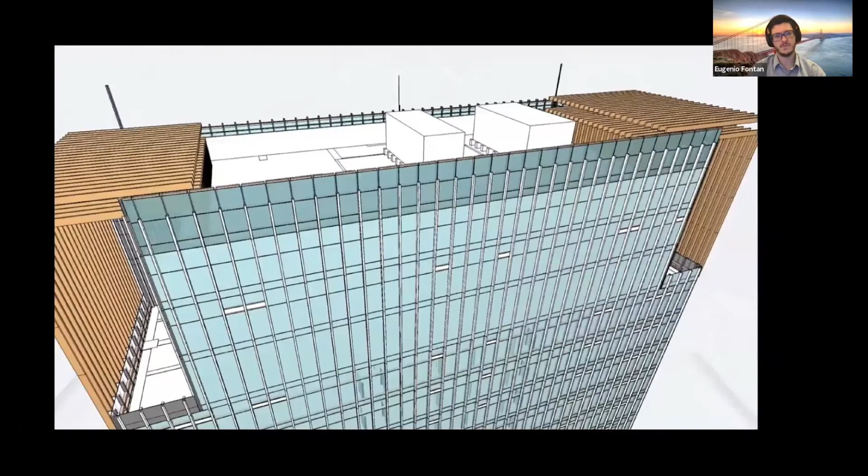In my 40 years in practice, this is the fastest I've seen the AEC industry move. The complexity of the work we do now has changed dramatically, requiring us to apply the most technology possible and make our process more integrated and collaborative. We decided to drop to Archicad cold turkey, overnight. For better or worse, we would do all projects in Archicad. We had a few reasons: we did not want to give people a chance to go back to the old technology. Our lesson in any change is if you make exceptions for one, you have to give exceptions to all. There were no experts to help us in our market, so we researched and came up with the right workflow, system, and BIM standards for us. We built from one success to the next. In about 4 to 6 months, we were more efficient than with 2D technology. This was our opportunity to put ourselves in a place where we could excel, and that's when we went into the realm of programming. Our idea was to change our workflow to be very front-ended: we make a very detailed BIM model and ensure it's done properly. The amount of quality control we spend, you cannot imagine. The beauty is that once we've built this program, it automatically generates documents based on a very detailed BIM model. Six months of work we can now do in two days. Since we hold the BIM model, we realized we have something that can be processed for VR applications. We have the first cave facility in Asia. We're part of a technology group that developed VR applications, and we created an app so you can see the project in VR wherever you are in the world. It syncs in real time with what we see here in the cave. We should always be in a position where we're afraid, knowing there are risks, but also knowing there's a bigger gain if we succeed. It's the same feeling I had when we committed to go to BIM. We just committed to change.

Well, I think it's a really great example, Nate. I truly admire this team.

So just to summarize the conclusion, I believe that architects' relationship with BIM technology should change, because we still rely on manual work and duplicate efforts.

We all often talk about the BIM software that we use, describing all the problems that it has, which is something that is common. But what we propose is that our BIM solutions are truly able to give an intuitive workflow for architects. Our ecosystem of solutions aims to provide an easy to learn and flexible workflow. We automate and leverage technology, and we avoid errors, so we are more efficient and save time. We can also work from anywhere, which is going to be the new normal. And we can focus on our passion, which is adding value to architecture.